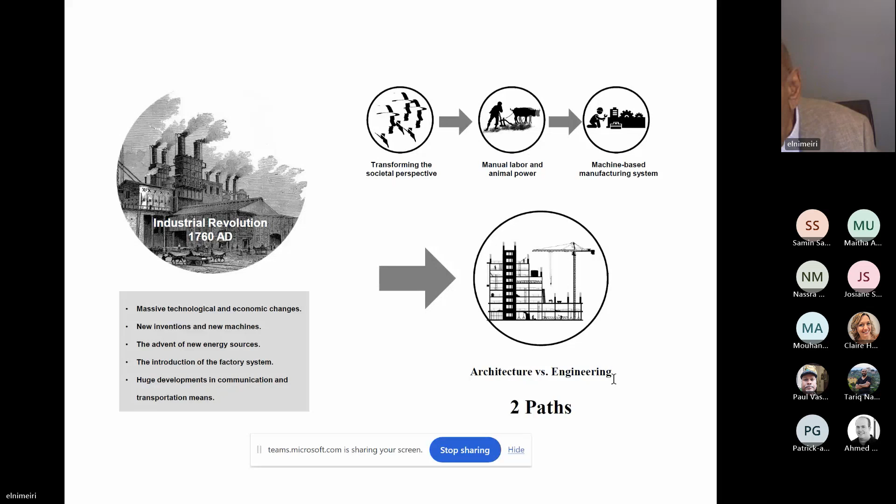The massive economic change and new invention of machines, the advent of energy sources, the introduction of the factory system, and all those things created two paths. The architect stayed with the art and the ideas of aesthetics and vision, but without the tools to achieve it. The engineer, on the other hand, found himself or his hands full trying to get involved in the physics and the development of technology. So that is the beginning of the two paths, the two directional paths that unfortunately created this kind of problem.

In America, in Chicago in particular, 1871 was an important day. There was a Great Chicago Fire which, if you look at the right side, destroyed almost all of the city at that time. But like many events like this, disasters always lead to innovation. Unfortunately, people will wait for a disaster to happen, and then they start innovating.

So in Chicago at that time, that was the emergence of Chicago as a major industrial city, it still is, and a major economically booming place. When this fire happened, architects like Daniel Burnham, Louis Sullivan, William Le Baron Jenney - these are just examples of them -

they got together and decided to make a master plan for the city, deciding that the city has to go up, to be built tall, in order to accommodate people and also to avoid fire spreading because of wood and other materials. Those household names, I hope you, especially the students, remember them and look them up, because those guys started what we call the first Chicago School of Architecture, which created a direction so important in how to build tall buildings.

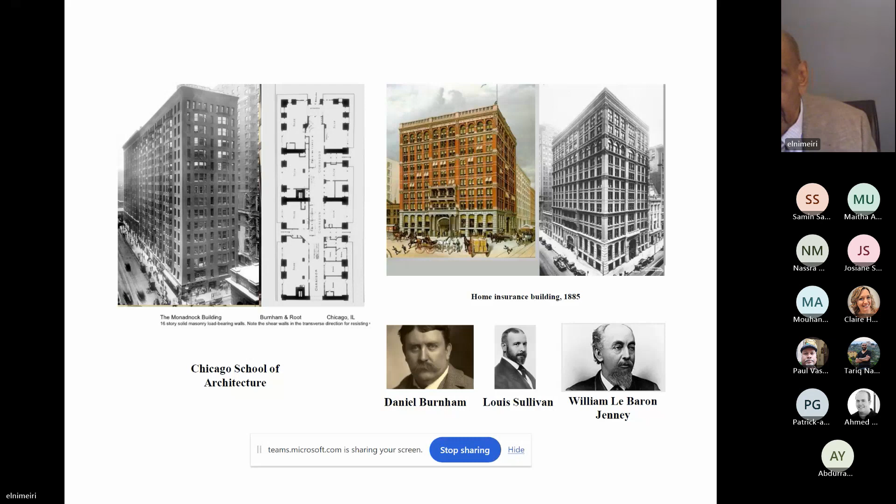These are a couple of buildings from that era. Those buildings still exist. The Monadnock Building, Chicago, 1891. In fact, I had a course about the first Chicago School, and the headquarters where we used to meet - Ahmed, I think, was coordinator - we used to meet in this Monadnock Building. The importance of the building is in two parts, the north side and the south side. The north side is a masonry building. It was for a long time the tallest office masonry building in the world.

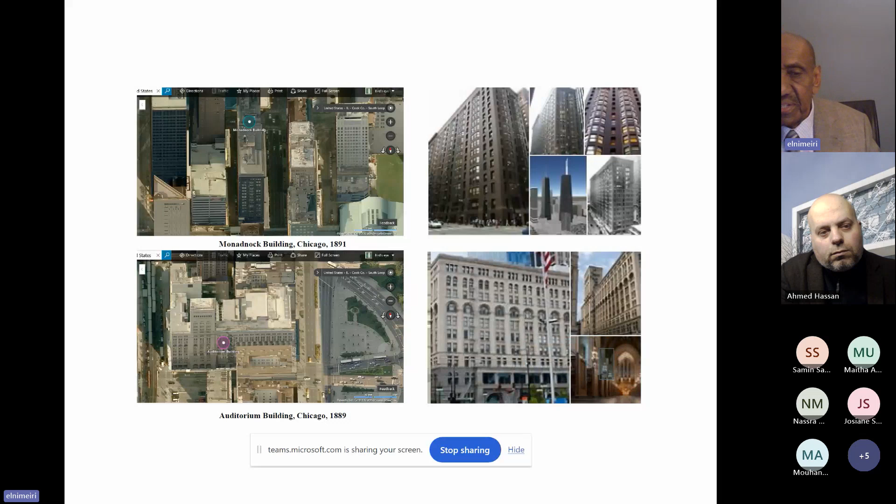And of course, the other building by Adler and Sullivan - Sullivan was a great architect - is the one on the lower side here, the Monadnock and the Auditorium. If you ever come to Chicago, the Auditorium is a place for meetings and other things. And of course now also Roosevelt University is in that building.

I want to make the connection with IIT, Illinois Institute of Technology. Those two slides to the left, Mies van der Rohe - I hope that you know of Mies van der Rohe, one of the greatest architects ever. For us in Chicago, it's probably so important because he came with the vision. He came from Germany, where he was the director of the Bauhaus school. When he came here, he decided that he wanted to create a new direction because there was a new material in steel, a new vision, and he looked at the tall buildings around him and decided he had to take another direction, what you see on the right.

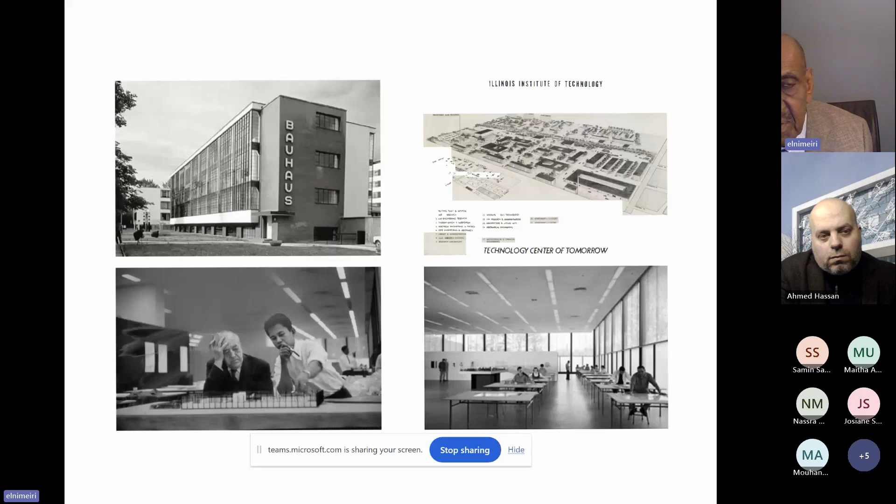By the way, the lower right-hand corner - when I say right facing it, but it is left as far as the slide is concerned - this is Crown Hall. Crown Hall is the home of the College of Architecture at IIT, and we will see it in a minute. Crown Hall was designed by Mies van der Rohe. Some of the faculty that came with Mies van der Rohe included Walter Peterhans. This was 1940 when Mies joined IIT.

There is a course, which still exists, called Visual Training, and those exercises are still offered. The Visual Training, as you can see, I'm just showing you a plate - Visual Training exhibit, 1944. I'm sure, in your own courses, at that time of course there were no computers, so everything was done by hand. But it has beauty, it has order, it has well-set proportions.

The whole idea of this course is to enhance the visual ability of the architect, because 99% of the architect's work is really visionary. You have to envision and you have to make a judgment that's consistent. Not judging something one way today - like Mies van der Rohe said, we cannot invent architecture every Monday morning. You have to be consistent in your way of thinking.

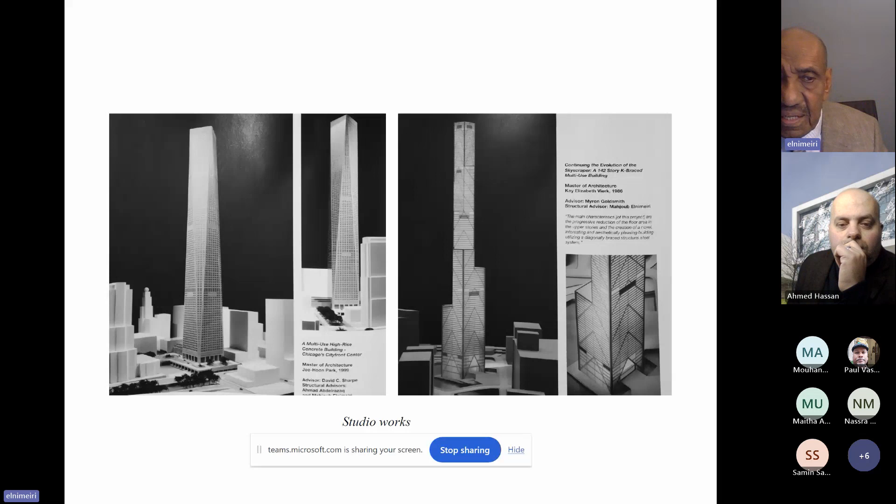The other one is application. Like I said, if architecture is not realized, then it is not architecture. So they have to see these ideas realized, which I could show here, for example.

This building to the right has realized this idea. In fact, at MIT, one of the dorms was built with this idea of the stiffening of the form.

Another idea—this was when I joined IIT, my first project as an adjunct professor; I was at SOM at the time. You can see to the left side, this is a bridge, a longest-span bridge. We tried to test the idea of how the bridge is supported, and one idea was to use cable stays to support the bridge because we wanted the bridge to be very thin.

So how do you arrange these stays? You have to arrange them in such a way that they're structurally efficient, aesthetically pleasing, and part of this whole idea.

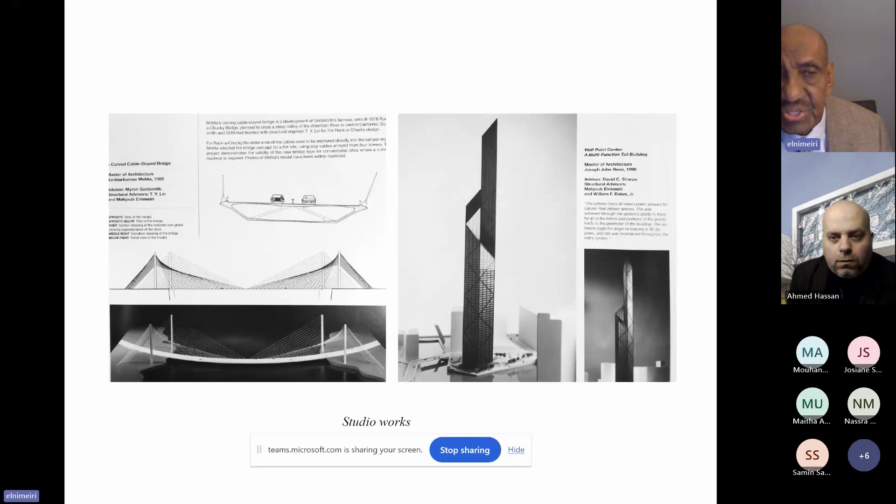And this process is repeated many, many times—this connection between reality and practice and research and teaching.

This is also one of the projects I was involved in, which is form finding. There is a relationship between form and structure, a relationship between form and architecture, a relationship between form and the facade. There has to be a process where we feel all of them work in tandem so we can go forward.

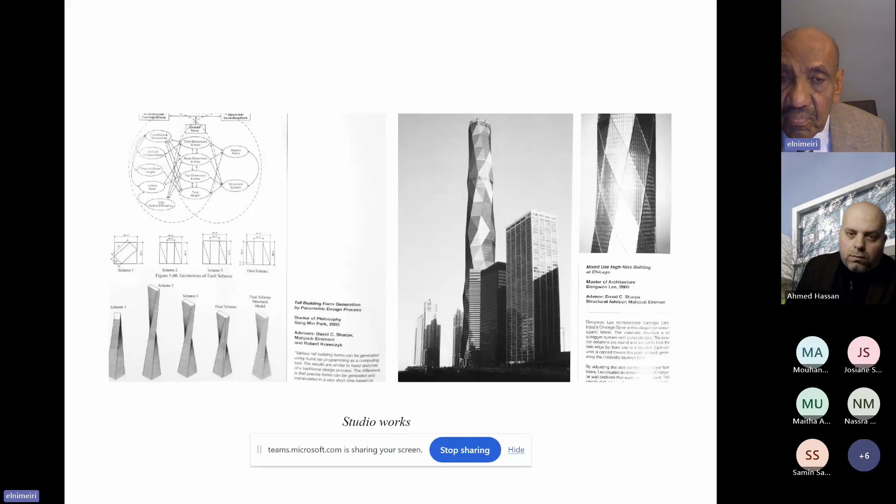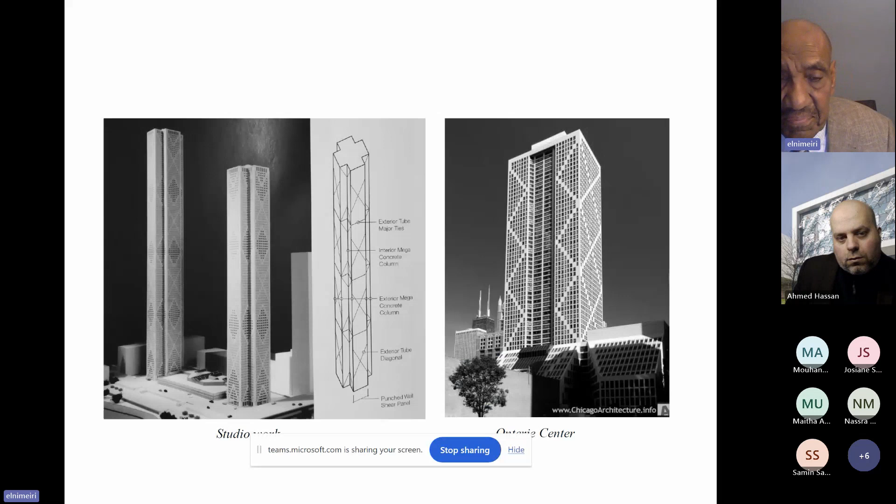The research of that student was way, way before Ontario Center was built. Ontario Center was built in 1986, but this research was done way back, maybe in the '70s.

So this is what I was trying to say—there has to be an impact of that research. That research has to be applied, and that research has to influence. By the way, I forgot to mention that this process started in the '40s, in the '50s.

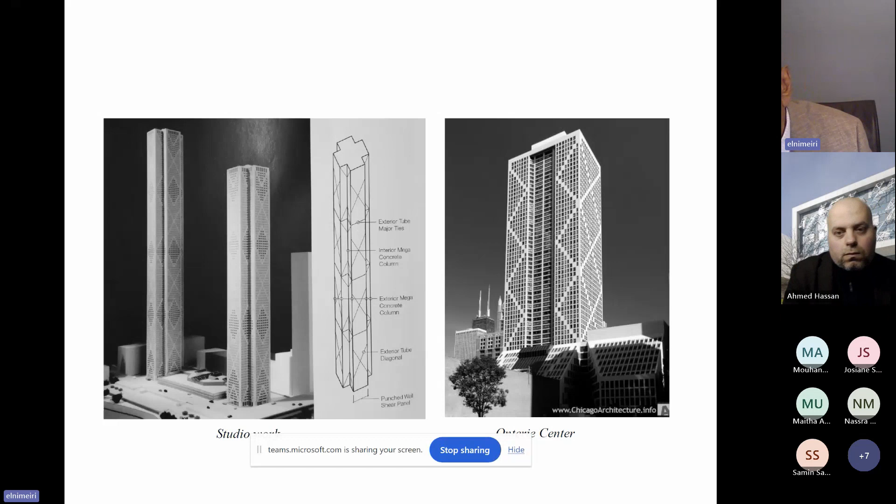It started what is called the second Chicago School of Architecture. The first Chicago school was Burnham and the others after the Great Fire, and this Chicago school came after Mies came here and started looking into this relationship between research and construction.

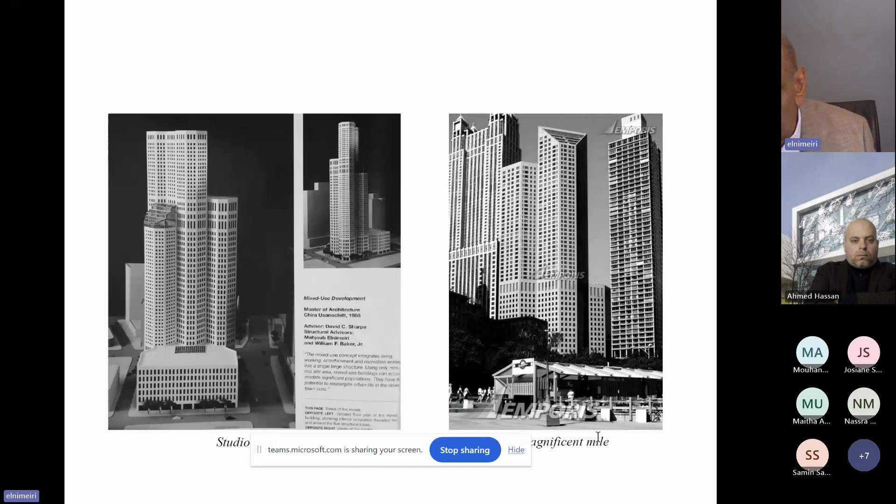But the idea of the John Hancock Building came from IIT also. Niko Sasaki was a Japanese student who came to IIT to study under Mies and Myron, and Fazlur Khan was teaching there as an adjunct. He came to try to figure out if we can design a tall building that can resist earthquakes, because in Japan, earthquakes are an important element in the design of tall buildings. So that idea came, and then it was used for the John Hancock Building.

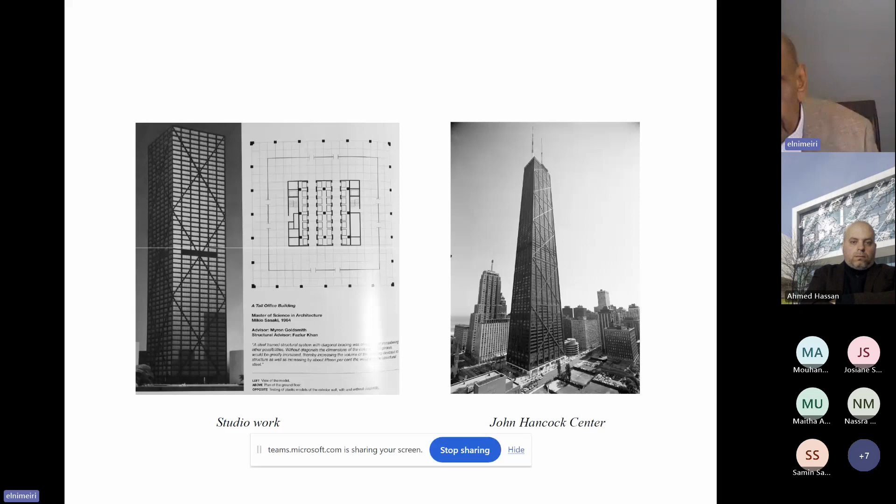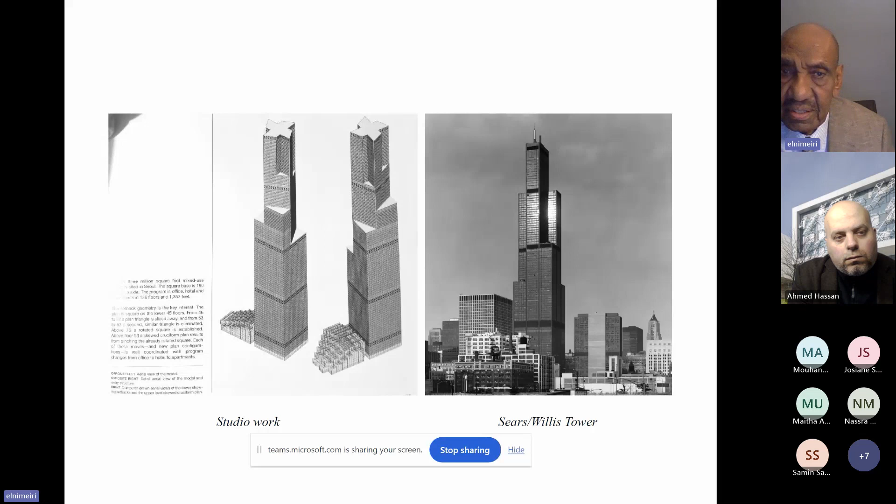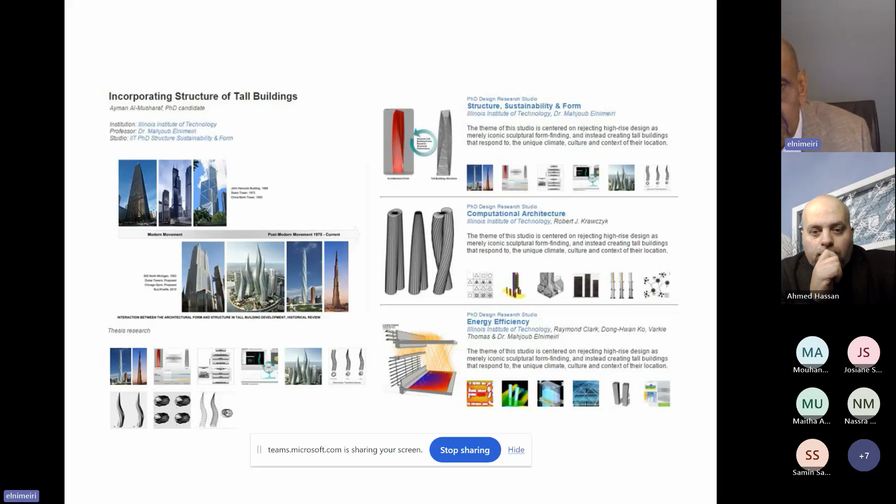Another research here was structure, sustainability, and form, and I'm going to go into a little detail here. Dong Hwan Ko, who is a professor now in Seoul, Korea. By the way, I have Professor Ray Clark and Varkie Thomas, and myself, developed this.

Varkie Thomas was a great mechanical engineer who had great knowledge in the Department of Energy, and he wrote a lot of programs. Ray Clark was a partner, a friend of mine at SOM, and he still collaborates with me. On the right side, we have Song Min Park, who is also now in Seoul, Korea, trying to test the form generation.

But all the testing we're doing is not in isolation. Again, it's not an exercise in geometry. It's an exercise connected with structure, and of course with the facade, and also the function. The function, of course, is architecture.

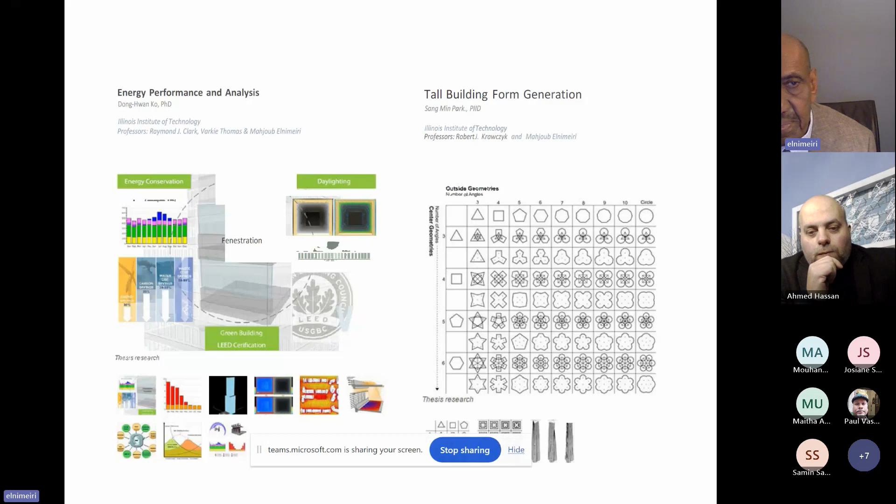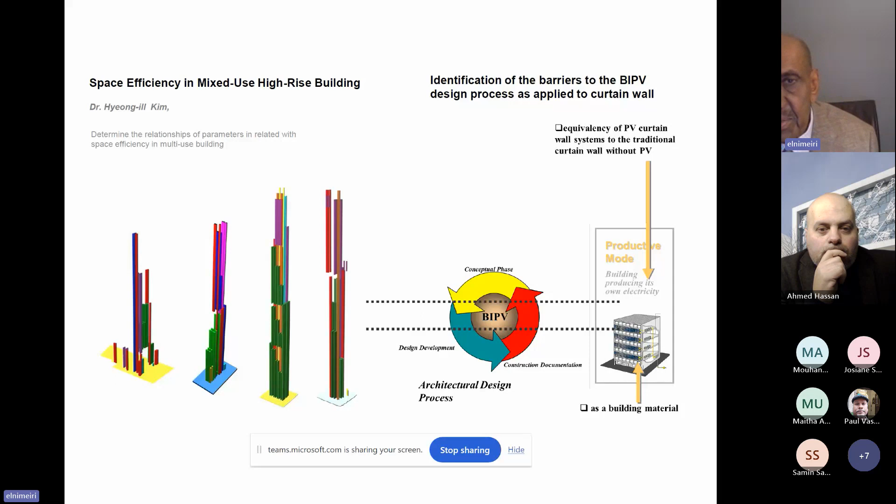It's also research done by Hatice Sozer, who is now a professor in Istanbul, and she was my student. Another research at that time was also by Shumnan, who is now, I think, the dean somewhere in Bangkok.

And he was looking at something so important at that time. Essentially, he tried to combine interlocking the stack effect ventilation with building thermal mass, to utilize thermal mass and to be impacted by the stack effect. The stack effect actually nowadays we call it a double skin wall. And then how in winter the behavior is completely different, which is the passive solar thing, and night ventilation of course is different.

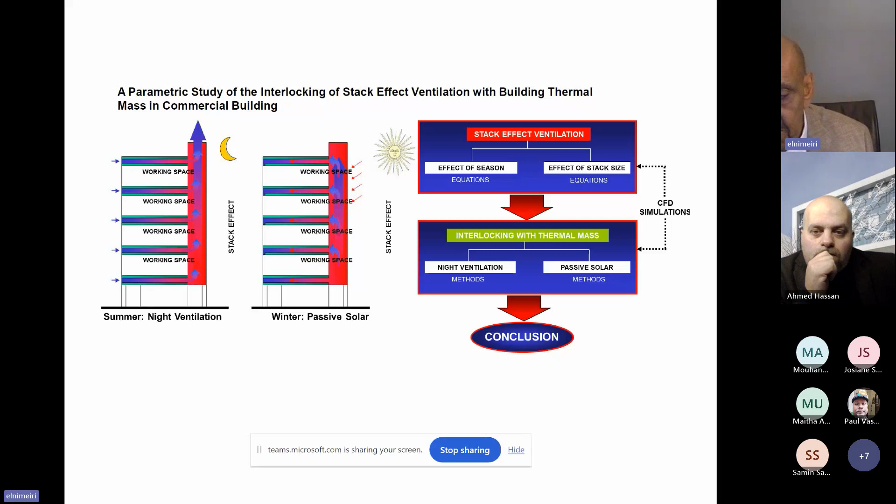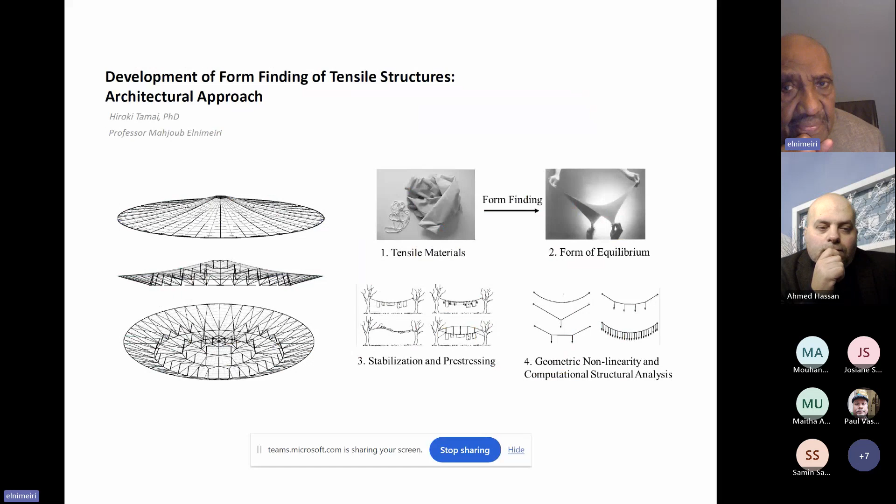Another important piece of work involves Hiroki Tamai, who is a practicing engineer and architect in Tokyo, Japan. We were always digging into this tensile material. When you have a tensile material, how do you create a form that works structurally and architecturally? Tensile material doesn't have form of its own, so you have to stabilize it. But how do you generate a form that works? That was the essence of this research. We've published all this research together, and I myself also published. We emphasize the development of form finding of tensile structure from an architectural approach, because we'd like to see how the architect starts, since the architect is the designer of the building. The architect has to realize the importance of this material, how to develop it and make it work.

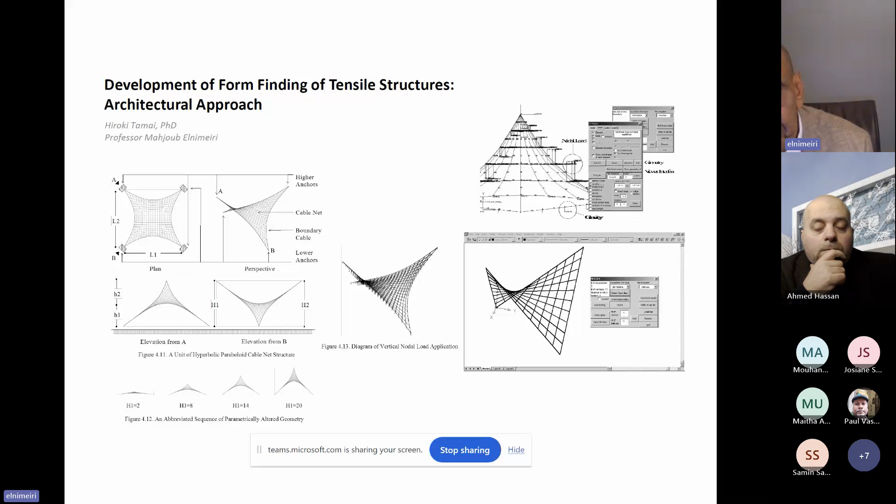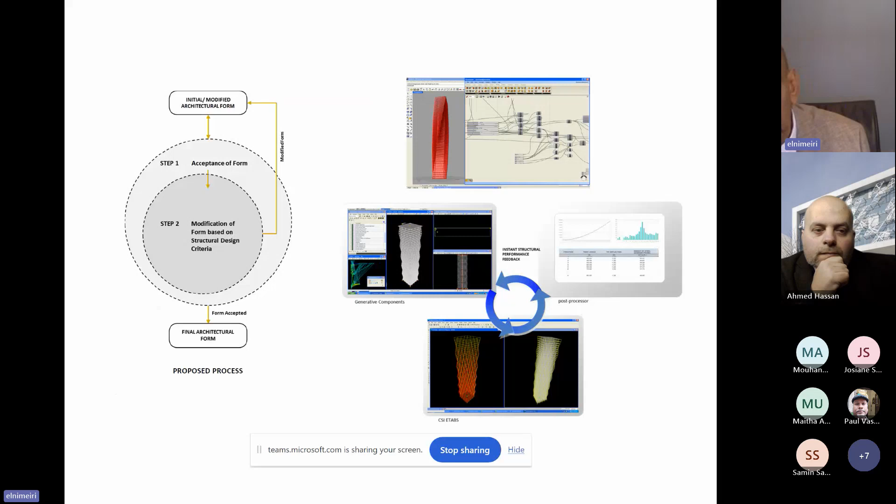This is a very recent work, again using modification of form based on structural design criteria. And this, of course, we're using Grasshopper and the plugins that you can use to develop some of those ideas.

This thesis of Ahmed was very important, not because he's here now, but because he brought a lot of value with his bio-enclosed facade panel. We wrote a couple of important papers, one for a conference in Switzerland, and another in Germany. Ahmed also won a few important awards on this, including the gold medal of research.

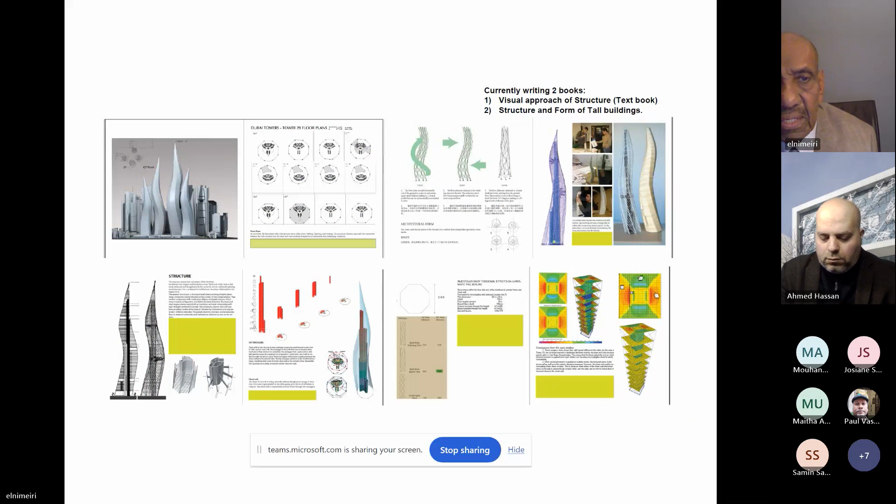This is an important project we have done, but I want to make sure of the time, so I want to hurry up a little bit.

EEC Plus is my consulting firm, and I can quote myself here: we capitalize on our ability to think the problem through from its inception to realization. This is something we learned from the philosophy of Mies, that you really cannot start designing something unless in your mind you think the problem through from beginning to end, to the realization which is the construction. How would it look, how would this happen.

I'll show you some of these projects. This one we did with Zaha Hadid in Dubai, 2013. It was a wonderful project, and in fact one of the last projects that Zaha was alive for.

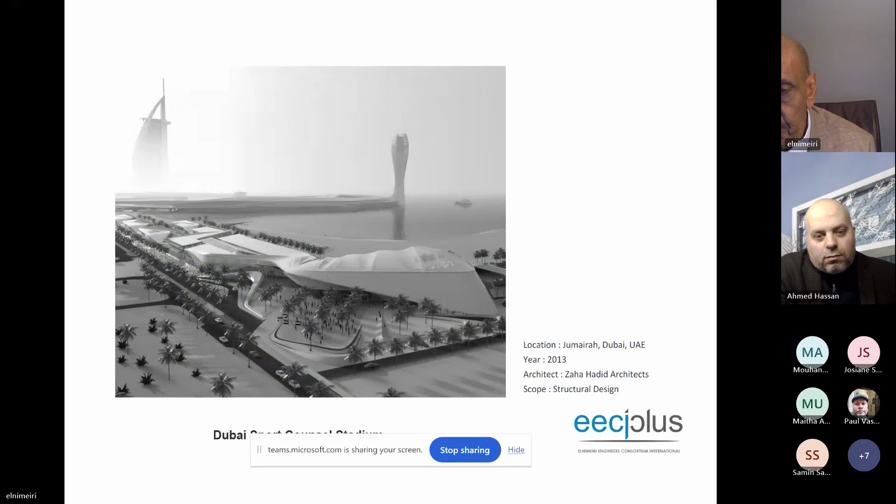Another project, Jumeirah project. Again, we did the structure for this building. This building, Kamal family, the tower. We collaborated with TVS here in Chicago, in Atlanta. And these buildings are all realized.

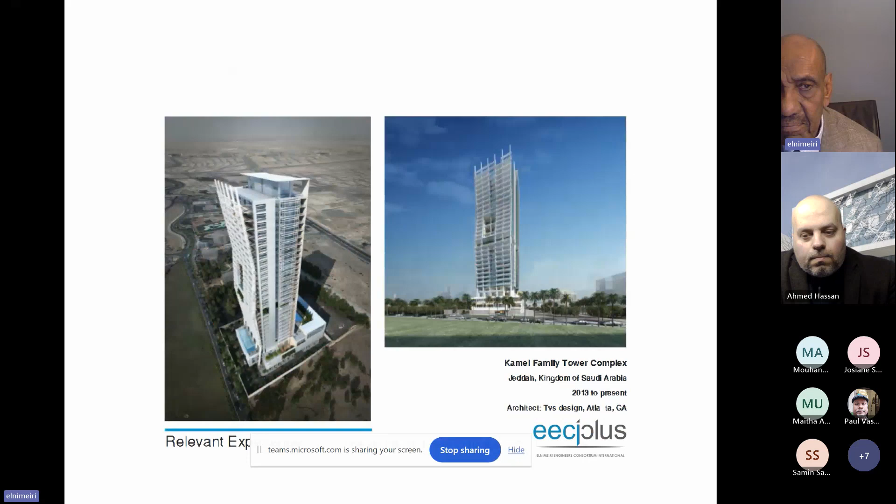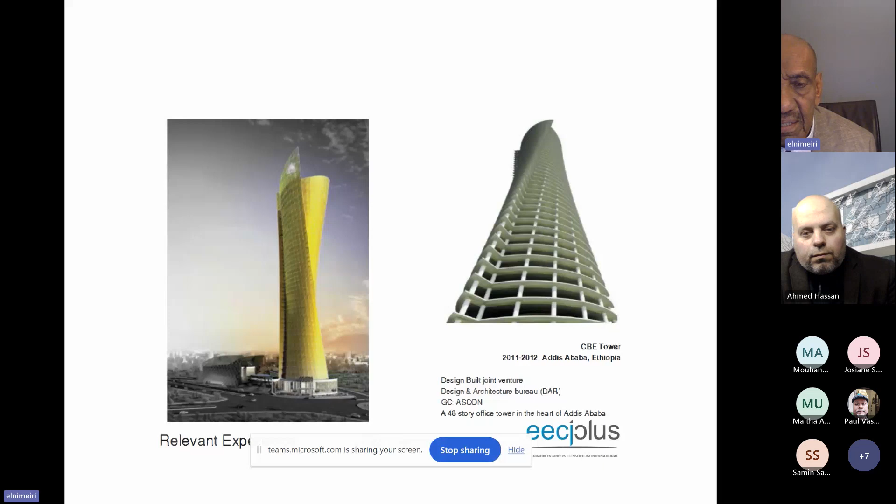This one in Ethiopia, it's a bank, and the architect has some wonderful ideas. You don't see it, but we have two wind turbines in the top to be used to provide electricity for lighting at the building.

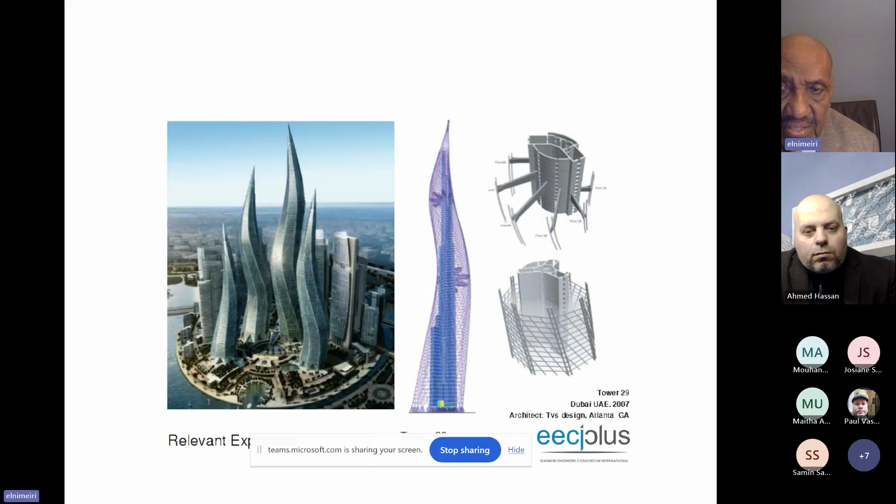Tower 29, in fact, we started the project, but then when the economic crash happened in 2008, the project did not go forward. So for the last few slides, I just want to talk about our architecture PhD program.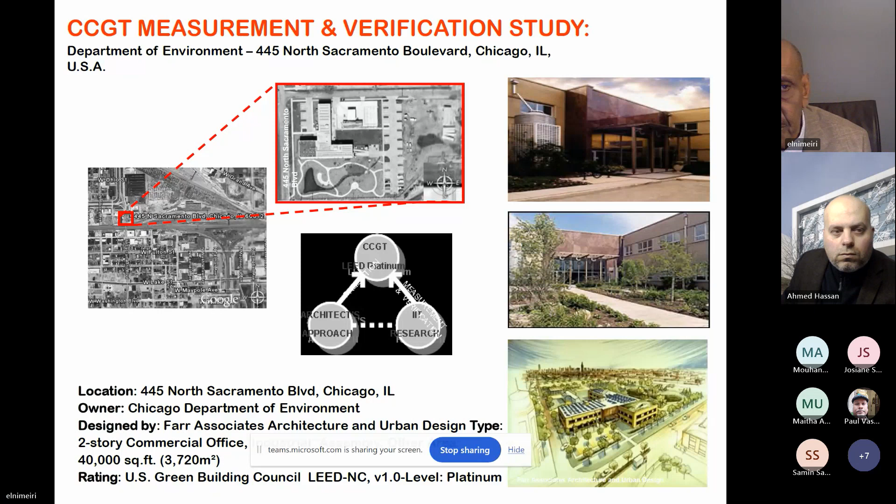We used our computer capabilities at that time, and these are some of the results - using the highest standard, the solar power, the daylight control, the rainwater, the recycling. This was done about almost 20 years ago, maybe 15 years ago, and all these things at the time were being done for the first time.

And our monitoring proved that the architect was doing the right thing. And they won the platinum LEED certification, which is the highest certification.

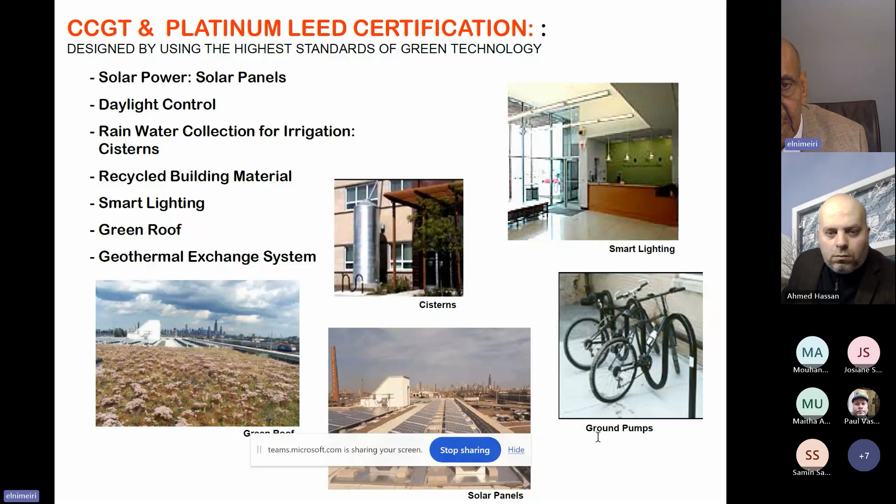Another project, Al-Ghurair University - I think I went to Dubai, and Sheikh Al wanted to have a university which is built now and everything else, as you can see in the bottom slide. And I think we built it within certain guidelines, and then we tried to create a situation here.

Because it's a university, we tried to create an environment that would enhance natural ventilation, coupled with minimizing the energy use. And it was a wonderful building. These are precast, and I was there a few times.

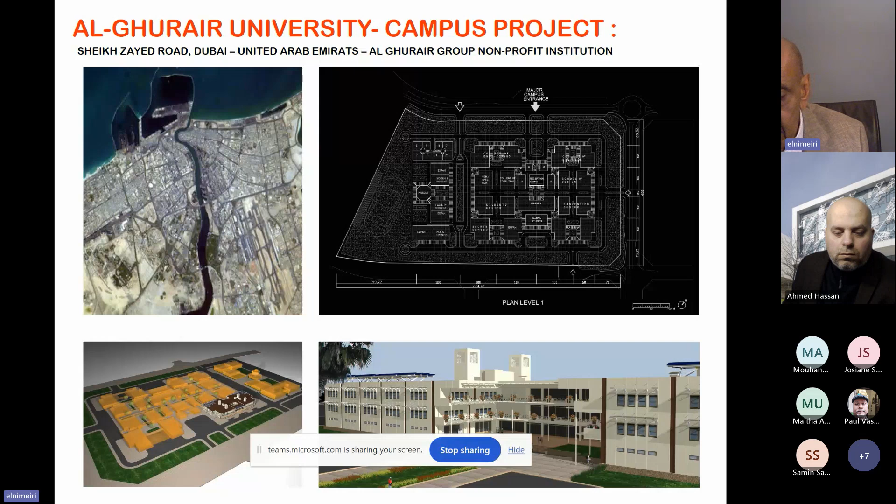What do you look at the PhD program for? To be an expert, specialized research, to be knowledgeable and cutting edge, to be a teacher, to be vision, teaching, research, like applying discipline skills.

What is your value in practice? Expertise, insight, new vision. And this could happen not just for a PhD, it could happen for a master's degree.

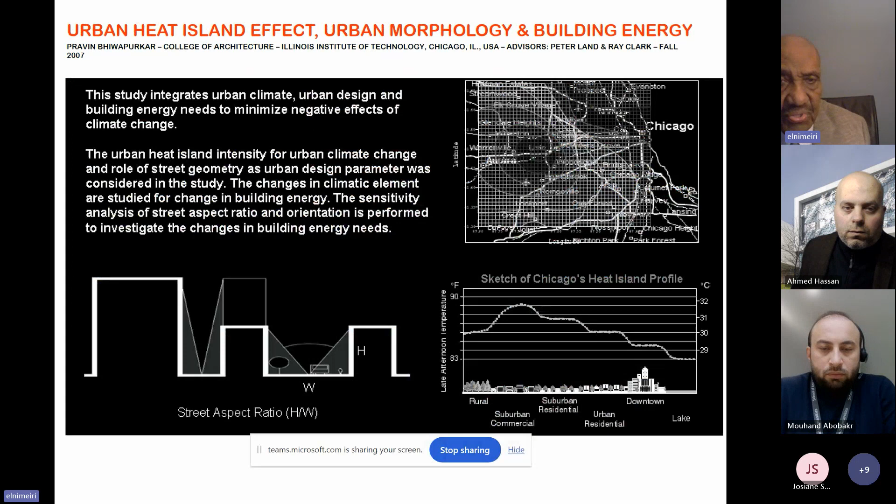I don't want to talk about this too much. This is a couple of projects just to mention. This one at the time was also important - we look at the urban heat island effect, which comes from the building next to the other building, the impact on the street, and heating.

This one is a dear project to myself because my student, Tallal, who is now professor at University of Khartoum, did an incredible work on this so-called courtyard and looked at it. He did a lot of simulation and testing.

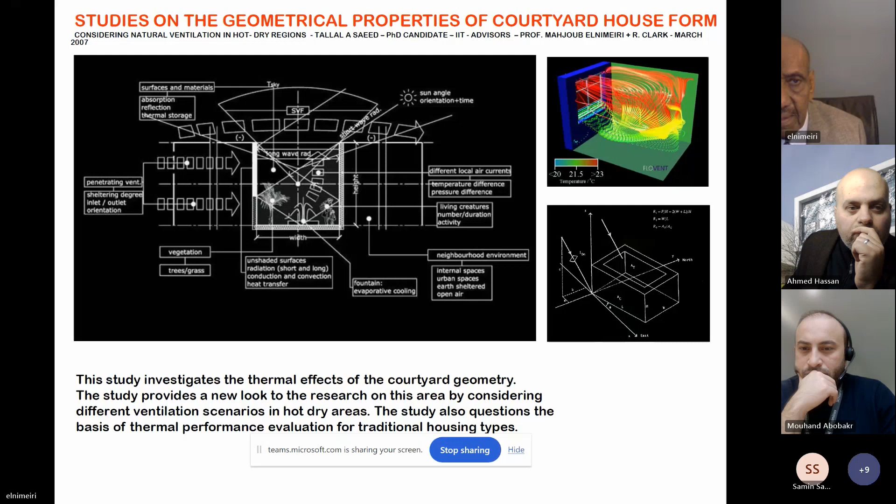This is the second-to-last slide. A friend of ours, Ken Yeang, and I hope you guys know about him - he's an architect who has a PhD also from the University of Cambridge. And he wrote all these books at the bottom. He's the father of this idea of eco-design, and he believed that, and he wrote a book about the skyscraper.

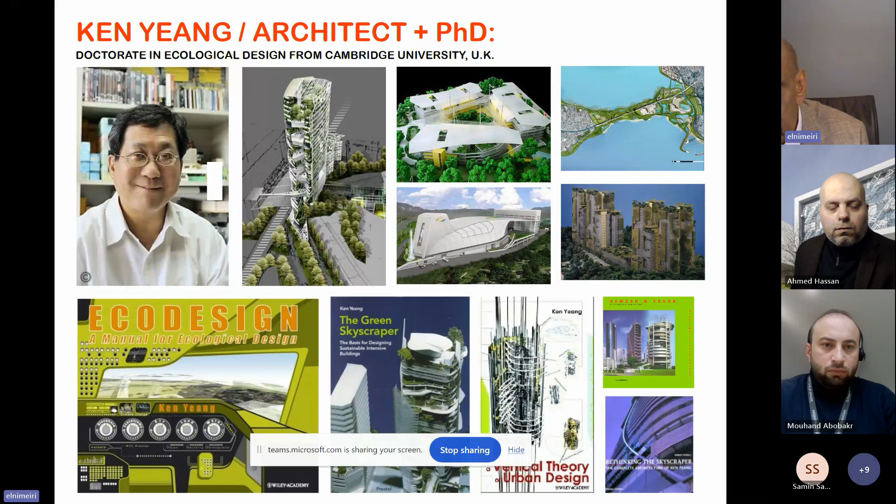I was privileged to know him. He came and worked with us, helped us for about 3 weeks. Ken Yeang, originally from Malaysia, is just an incredible source of knowledge. So if you guys look at this name, maybe you can invite him one day to say something.

And this is my last slide. I always think about it - why we're doing all this. At the end, to make this world better and to benefit the unprivileged. And I'm looking here at those kids from Africa. To the right, you see how the world is and how global warming is affecting it.

Thank you so much, Professor Elnimeiri, for this interesting talk. You took us on a very long tour through the history of tall buildings and structures, and the interrelationship between structures and architecture, and how it's important throughout history, and why we're having this dilemma today of two separate paths for architecture and structures. So you're now looking for more collaboration between them, because this is what we're learning from new projects done all over the world as icons - that this is a golden opportunity for architecture, structures, and other consultants to collaborate in an interdisciplinary approach, not separated as before.